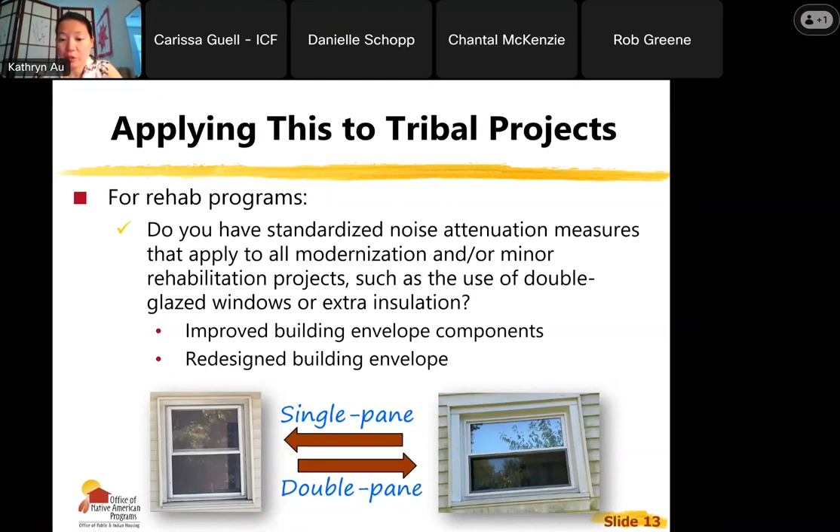And here we have a single paned window, and then in that unit, they rehab that and change that into double paned windows. So you can see an example there. And so if you do have standardized noise attenuation measures that you apply to all your projects, no matter if they're in a loud area or not, then your project is in compliance. You just document your policy, your standards for this type of rehab. And then in the environmental review, in the 58.5 checklist under noise abatement and control, you say no mitigation measures required, and then you list out what your standard noise attenuation measures include.

And so a recap of what we just went over before we go to the next section. First, you ask, is your project a noise-sensitive use? If it isn't, then the noise standards do not apply to your project. You just document that your project is not a noise-sensitive use and you're in compliance. If you are a noise-sensitive use, such as housing or a place where people sleep, then we ask another question. Is your project modernization or minor rehab?

If your project is substantial rehab or new construction, then you will have to screen for noise generators near your project. If your project is modernization or minor rehab, then we ask another question, which is, does your program include standard noise attenuation measures for all units? If not, then you just go ahead and screen for noise generators. But if so, then you document it and you're in compliance, and we showed that in the previous slide. And so next we go on to the actual noise analysis where you screen for noise generators near your project.

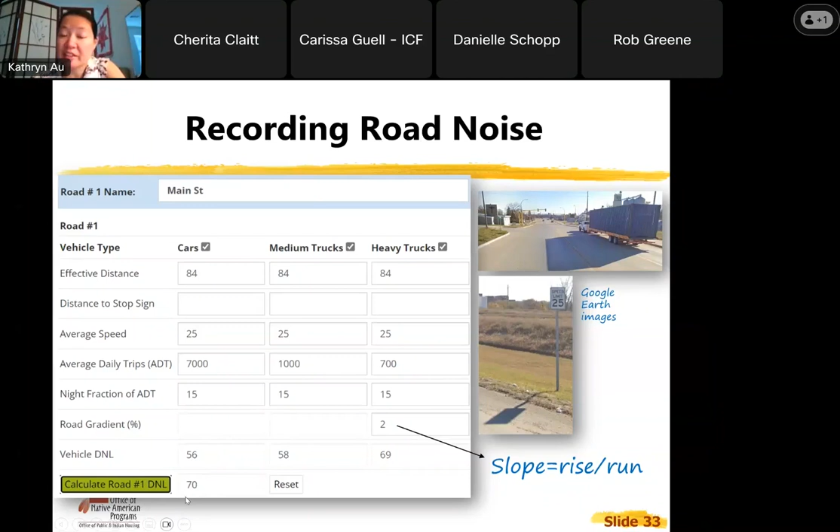And then I calculate the road DNL, and it gives me three numbers, one for each of the types of vehicles, and then combined together, they actually make a louder combined noise. So the total vehicle noise is going to be 70 decibels in this case.

Okay, so major roads. What is considered a major road? I don't think this is in the HUD regulations or even the HUD guidance, but just from experience and talking to different HUD staff, generally you can say several things. A major road can be a highway, state route, major arterial road, a road with 4+ lanes, a road with 10,000 vehicles per day. All of those would potentially be major roads.

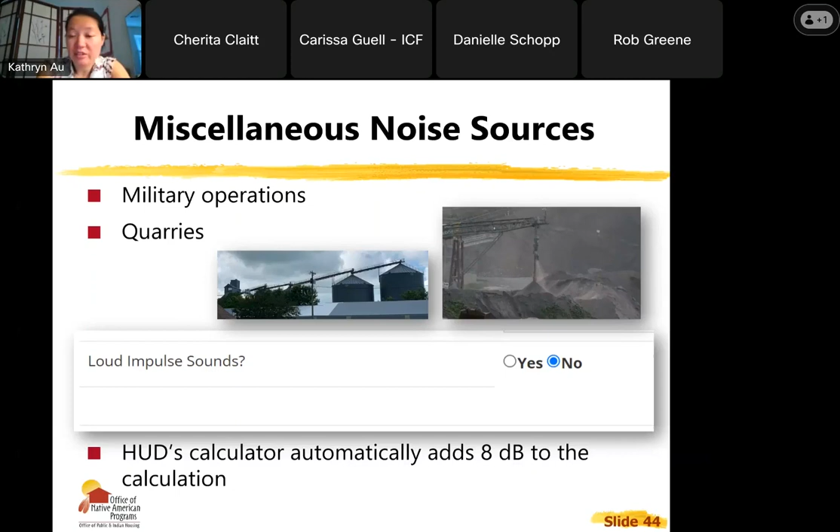And this is where if you want to say, well, it is loud, but it's not 8 decibels, then you would work with your HUD environmental officer and figure out, do we need to get a traffic engineer or a noise study to get that number lower. So if you're in that situation and you want to demonstrate that you shouldn't add 8 to your noise level, then you would have to find alternative studies to justify that.

Okay, so again, 65 and under is acceptable. 66 to 75 is normally unacceptable, and 76 and above is going to be unacceptable. Okay, question. In the instance with the railroad noise, how do you consider the noise generated at a switching yard where the trains and cars are coupling and uncoupling? Here you would include the number of switching trains in the calculation. And I don't have a good example of that at the moment. That's a great question.

Okay, so what do the results mean if you're acceptable, normally unacceptable, or unacceptable? So if your project is only modernization or minor rehab that's above 65 decibels, and again, minor rehab is rehab that qualifies for CEST environmental review, then HUD encourages noise attenuation measures, whether that's extra insulation, more energy efficient windows, more energy efficient doors, staggered studs, sealed gaps, things like that.

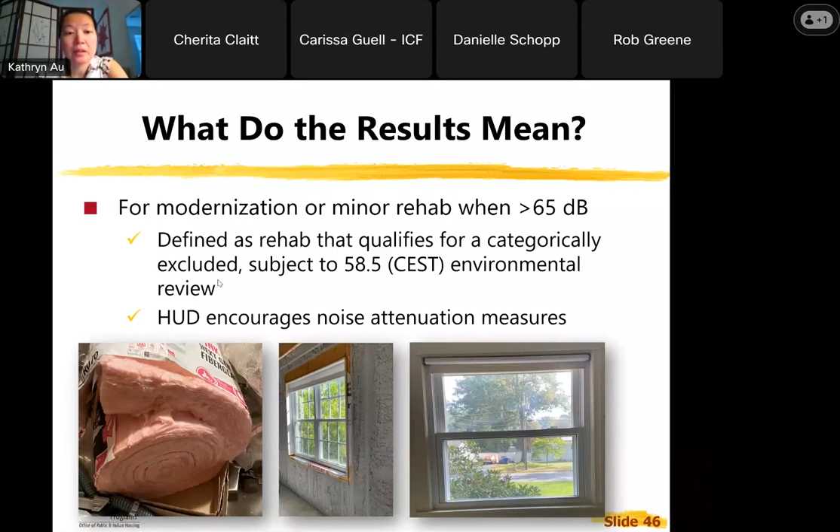For major or substantial rehab, which is defined as rehab that requires an environmental assessment, HUD shall actively seek incorporation of noise attenuation measures. If you're putting so much money and resources into a rehab project, then it's only fair that you invest some of that spending into more noise insulation to make the project better. Otherwise, it's not really a good project.

And then for new construction, if you're doing a CEST level new construction, such as building 2 new homes on 2 lots, if you're in the normally unacceptable noise zone, then you have to change your CEST to an environmental assessment. And then regardless, your interior noise levels should be reduced by at least 5 decibels if you're between 66 and 70, or 10 decibels if you're between 71 and 75 decibels. And that comes straight from the regulations.

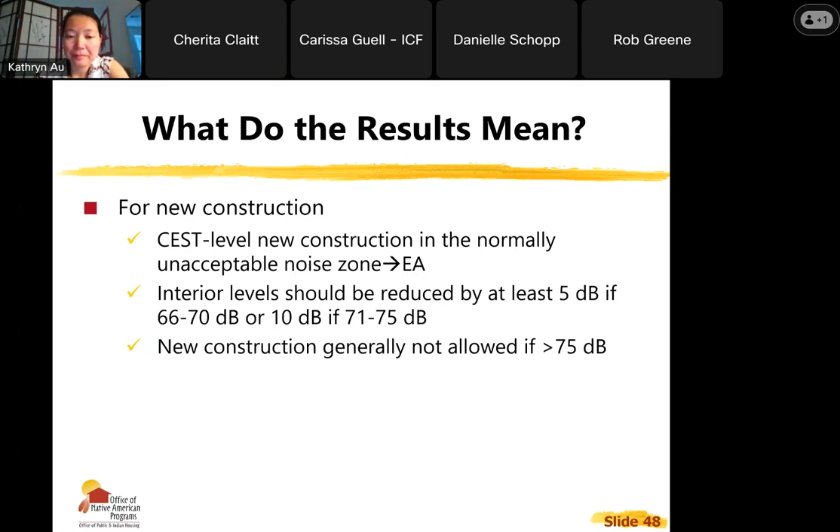If you're in an area that's more than 75 decibels, then new construction of a noise sensitive use is generally not allowed without a lot of approvals. Just to summarize all of those slides that I just went through, if you're 65 and under, you're acceptable. If you're 66 to 75, for the other two categories, it depends on what type of activity you're doing.

Modernization or minor rehab, if you're above the 65, then HUD encourages noise attenuation. If you're doing substantial rehab or EA level rehab, then HUD actively seeks incorporation of noise attenuation measures in your project if it's between 66 and 75 decibels. Otherwise, HUD strongly encourages that you convert the project to a compatible land use because it's pretty loud noise, and it's not really a good idea to invest so much money into a project with high noise levels.

If you're doing new construction, at 66 to 75, you have to reduce the interior noise levels. If it's more than 75 decibels, then it's not really permitted without a lot of approvals from different folks, and you would definitely need to mitigate.

Okay, going back to the previous question, switching yards, would you mark that as a loud impulse sound? I think I would count that under trains. Yeah, I'd probably count that under train operations, instead of a separate one. Okay, strategies for mitigation. Okay, let's see, we have another question.

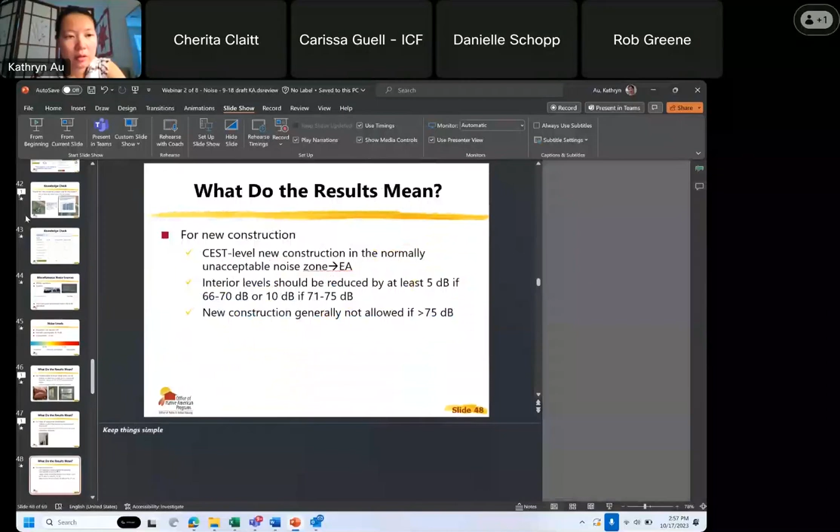Okay, if your project does need mitigation measures, there are 3 strategies to mitigate. The first one we mentioned already is making structural changes to the building, increasing the insulation of the building envelope. You could also build a noise barrier, a noise wall to shield your noise sensitive use from that noise source.

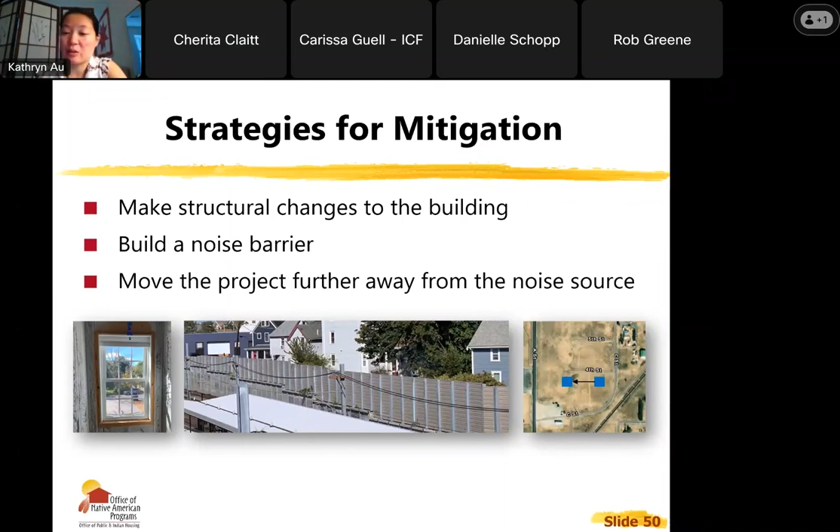And then the third one that folks don't always consider, and it really only makes sense if you're doing new construction, is moving the project further away from the noise source. So instead of having it very close to the train tracks, you could move it 100 feet or 50 feet away to lessen that noise. Just more examples of structural changes: again, it's typically going to be your windows, doors, walls, and insulation.

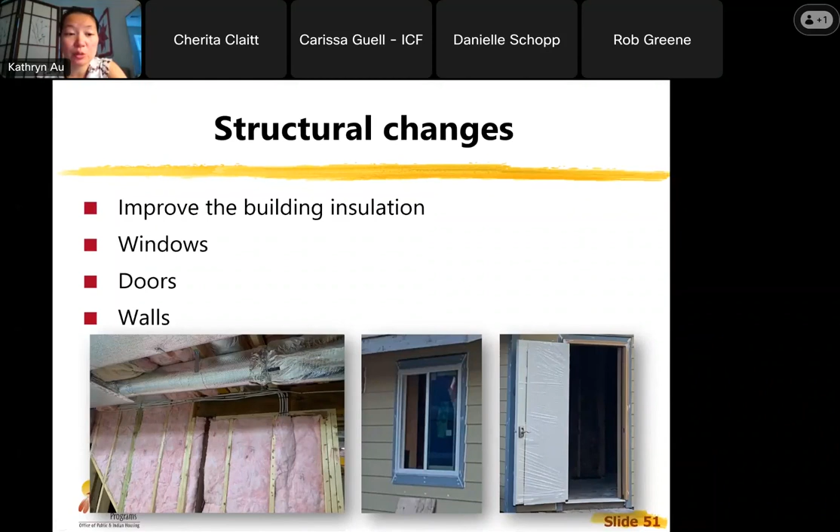And then real briefly, I want to mention STraCAT. This is a HUD tool, the Sound Transmission Classification Assessment Tool, where in part 1 you write the address of your project and the noise level that you calculated. And then in part two, you get to design a wall. And this is where you really need to consult a construction manager, engineer, or architect.

No. So here, given these calculations, I would go back to my architect, engineer, or construction manager and have them change out the material. Maybe start with the windows and the doors, and if we're building something new, then we can change the wall material and just make that wall more insulating until we get a yes on the bottom of that screen. Okay.

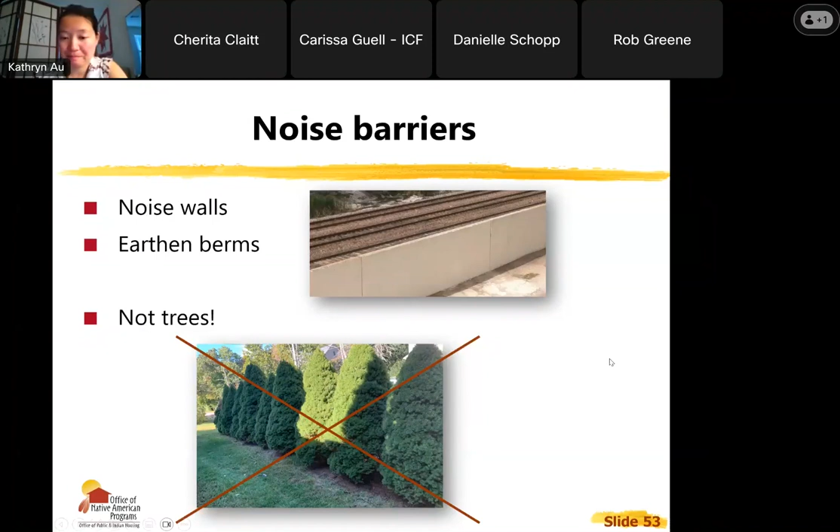Okay, for noise barriers, you can do noise walls, earthen berms. Don't use trees. I get that question a lot, and they might give you more privacy, but they can fall over, they can have gaps, they can lose their leaves. They are not effective in reducing noise to any extent that HUD will allow. And then for noise walls, if you are going to build a noise wall, there is a barrier performance module on the HUD Exchange website.

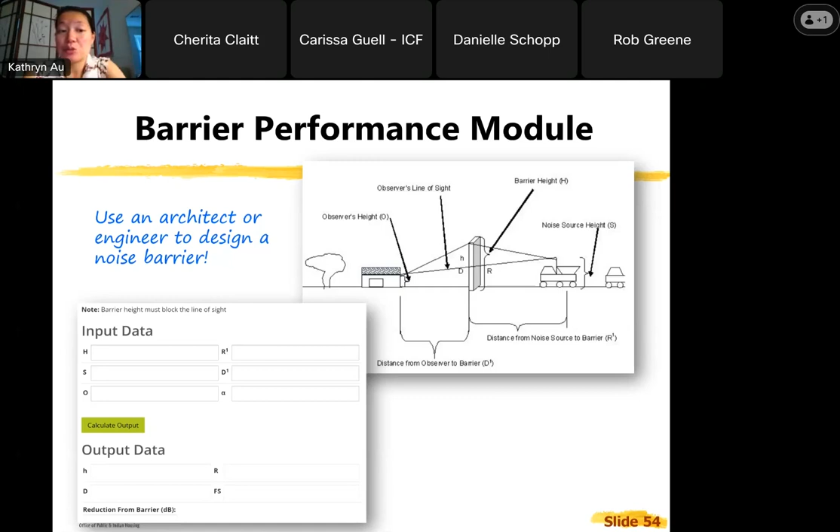Again, you want to consult your architect or engineer to design this, and then they can input different data on the height, distance from the wall to the building, distance from the wall to the noise source, and things like that. And then it will tell you if your noise wall is effective at mitigating the noise level to under whatever the requirement is in your situation.

If you're going to change the site configuration, especially if you're doing new construction, you can always move the noise sensitive use further from the noise source. So, if you're on a highway or on a major road, you can try to increase the setback so that the folks don't hear the road noise as much. Yeah, set it farther away from the trains.

Okay. And then I think the last knowledge check, just to make sure you're following me. If you're building new housing in an area with normally unacceptable noise exposure, which of the following is not a valid attenuation measure? Moving the house away, planting a row of trees, using triple paned windows, or building a noise barrier.

Okay, so this one's pretty easy if you guys were paying attention in the last minute. Just about everyone got this one right. Thinking someone might have clicked the wrong button. But yeah, planting a row of trees is not valid. Everything else is good. Okay, so that one was easy. So do not plant trees. You can plant trees, but don't count that as mitigation.

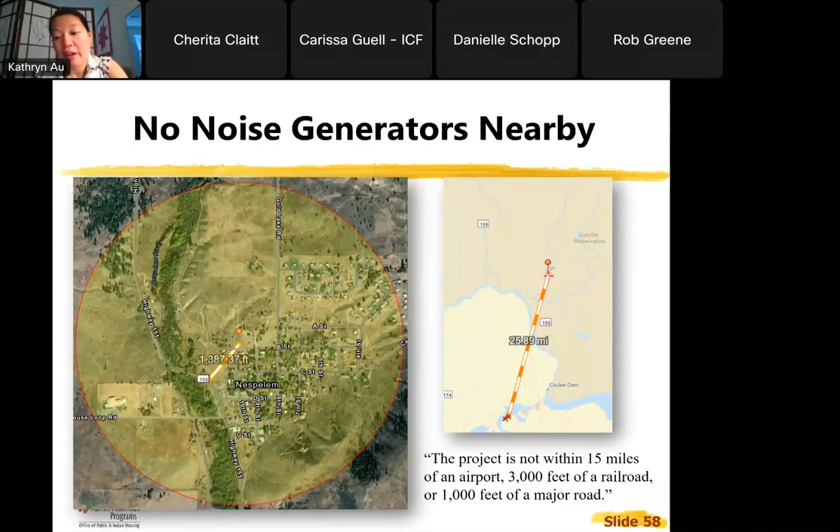So then in your review, you would just say the project is not within 15 miles of an airport, 3,000 feet of a railroad, or 1,000 feet of a major road. Let's say you only had a small airport nearby. If you're on the Pine Ridge Reservation, you're within 3 miles of Pine Ridge Airport, no major roads and no railroads, as you see in the bottom map.

So then I look up the airport operations. It's 2,400 operations a year, and that's from this year. So there's an airport, but it's really not going to generate much noise. So what you'd say is, the project is not within 3,000 feet of a railroad or 1,000 feet of a major road, but within 15 miles of an airport. As the airport operations are low, the noise is unlikely to extend beyond the airport boundaries. See airport operations data and small airport worksheet.

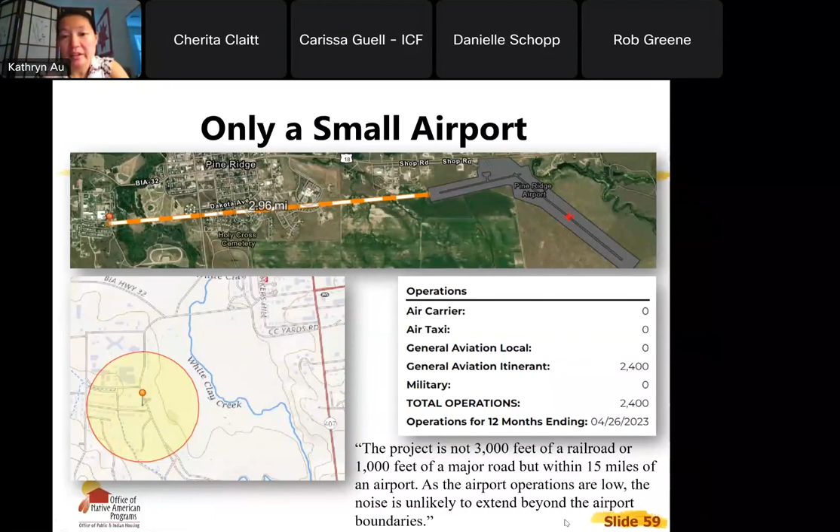Okay, if you had a train nearby, then you look up the train data. In this case, through trains, night and day, maximum speed, do the calculation, and that came out to 62 decibels. And so I would say the project is not within 15 miles of an airport or 1,000 feet of a major road, but within 3,000 feet of a railroad. A noise assessment was performed, and the DNL was 62 decibels, which is acceptable.

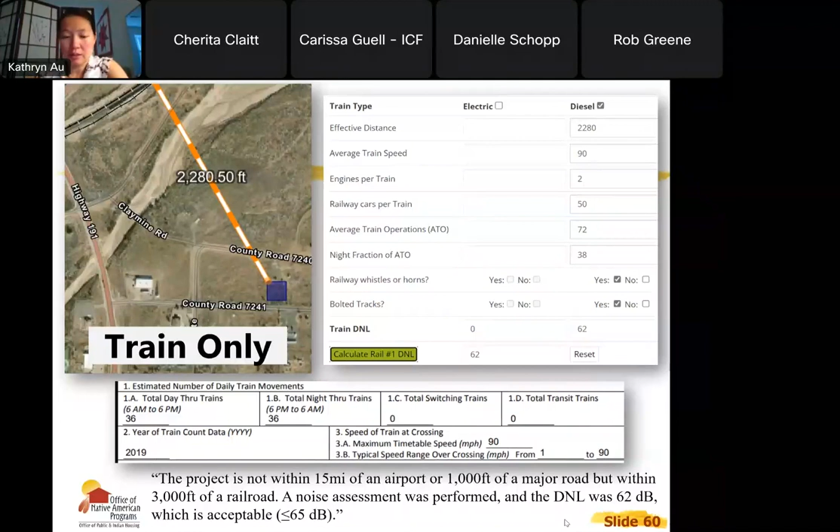And so then I do the calculation, and this came out to 58. So I'd say project is not within distance of an airport or railroad, but within distance of a road. A noise assessment was performed and came out to 58, which is acceptable. So this is really all that you would put in your environmental review for that.

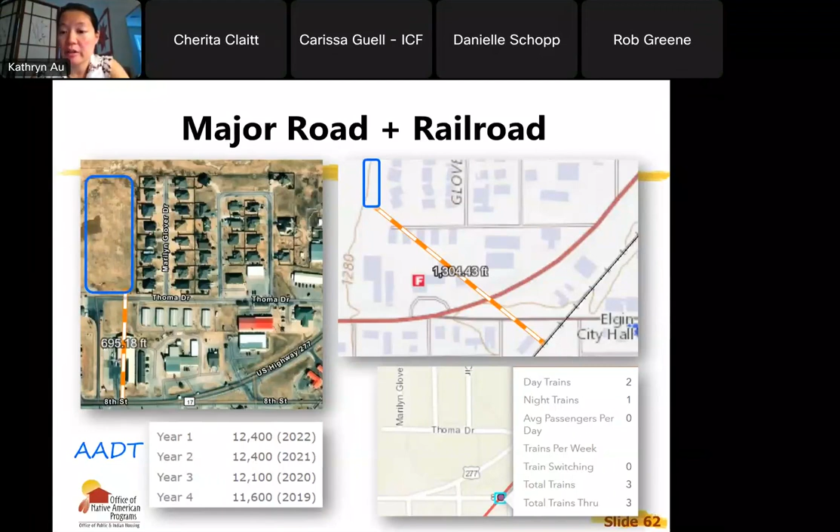If you had a major road and a railroad, and you were doing new construction, so then I find the road data, and then the railroad distance and data. I think this is Oklahoma. And so Oklahoma has its own website that will tell you the train traffic and train counts. And so I calculate the road noise, came out to 54. And again, the average daily trips or annual average daily trips will be for a 10-year projection.

And here I just assumed 5% single unit trucks and 3% combination trucks because I couldn't find more information. And then putting in the train, maximum speed was 25. That came out to 54. So combined it was 57. So this one had two noise sources, but it was fine.